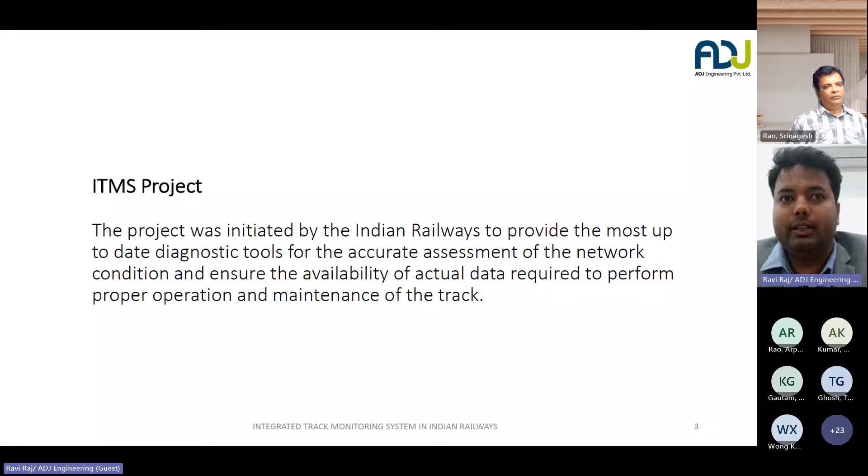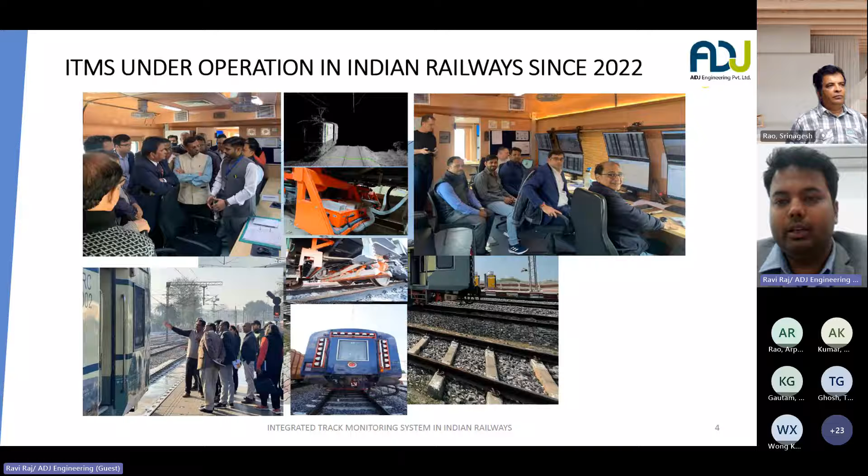Later, they moved to a contactless measurement system, which had a track geometry system and half rail profile measurement, which allows you to measure the track geometry also. It was not a full specification system, and it also had some acceleration measurement system. So railways decided to upgrade all the monitoring practices and take them to the next level, as the whole world is now following. These are some of the images of our projects. We have been operating this system since 2022 and have already completed more than two years of operation on Indian tracks.

The RDSO specification which governs ITMS is mentioned over here. You can see that TM/IM/382 is the specification floated by RDSO, based on which we developed, designed and manufactured this system and supplied it to IR. It has 6 subsystems. The main one is the track geometry measurement system. The second one is the full rail profile and wear measurement system. The third and most important one is the system for video recording of track components and analysis, which allows you to identify visual defects in the track in real time without any manual intervention.

Then we have acceleration measurement systems on the axle box, on the coach pivot, and on locomotives. Another important system is the system for identification of any obstacle in the schedule of dimensions of Indian Railways. And the last one is the rear window video recording system. In the next slides, I'll be detailing the functionality and the parameters provided by all these six subsystems.

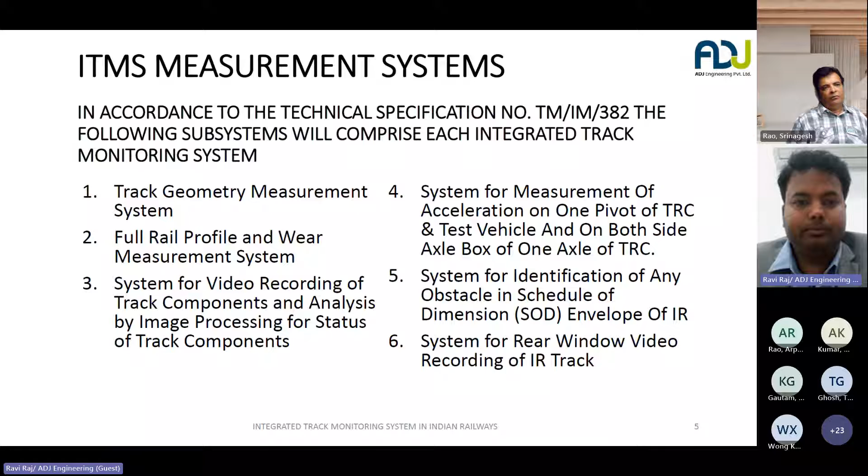So here you can see the general layout of the system. So we have been provided with a LHB coach, what RDSO calls track recording car, and on the same coach we have installed all our sensors. So on the leftmost part you can see some sensors installed. These are the sensors which we utilize to identify any infringement in the schedule of dimension.

Then here at the bottom, can you see my cursor? Yes, we can see it.

Yep. Okay. So here we have our video inspection system, and then on the other side we have track geometry and rail profile measurement system installed, and we have several other cameras installed, which enables us to identify some special kind of visual defects. And then we have acceleration sensors installed on the axle box. GPS sensors are installed on the top, GPS antennas.

In the lower part, you can see the inside arrangement, how the working spaces are designed. So we have four operator consoles where we can keep monitoring the evaluations being done by the system, what are the defects identified, if there is any urgent maintenance alarm. Then we have all the server racks, sitting area, and the printers are also there, which keep printing during the recording time to give you an online report.

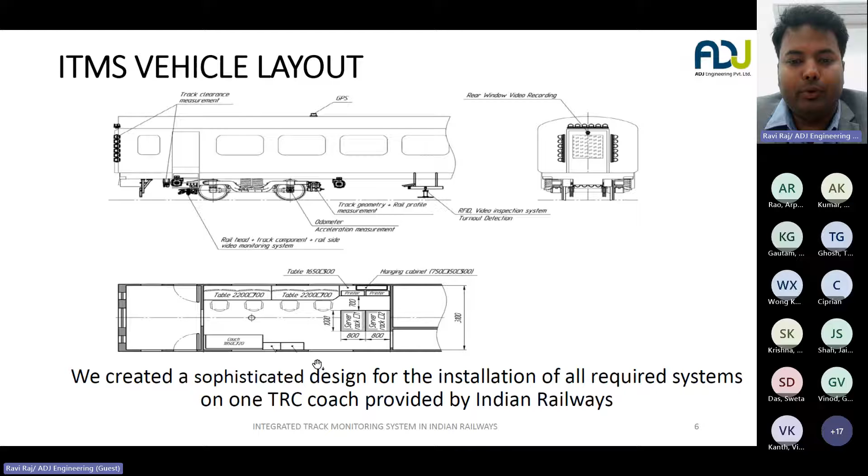So the first system is the track parameter recording system. So this system is based on the inertial measurement principle, contactless. It has a few main hardware components which I'll point out. So we have an inertial measurement unit, and we have a full rail profile system. So the hardware for track geometry and rail profile system is the same, and in combination they give us the parameters of track geometry as well as the rail wear. So in the track geometry, we are able to measure gauge, cross level, alignments, twist, wear, cant, and gradient, which has been suggested by RDSO.

Here you can see there are two of these boxes, one for each rail. It has two laser lights, and then we have 3D cameras. So how does it work? I'll use this slide. So the laser illuminates the surface of the rail, and then we use our 3D cameras to take the images. So we get an image like this, and then we interpolate and get the complete triangulated view of the rails.

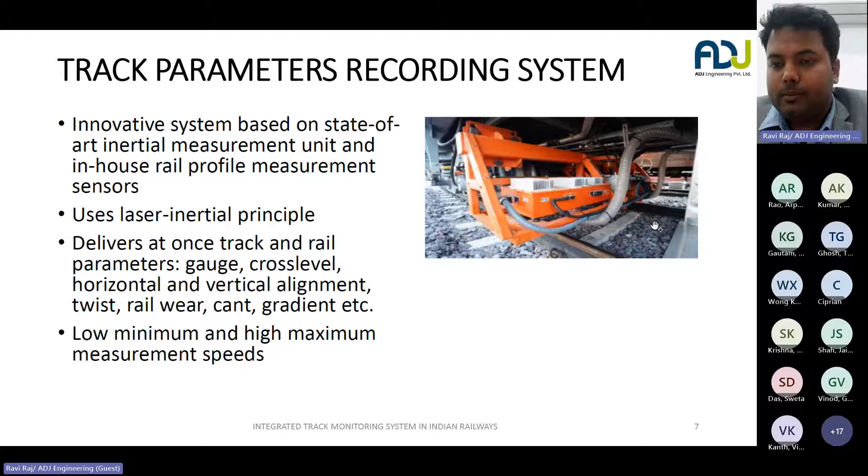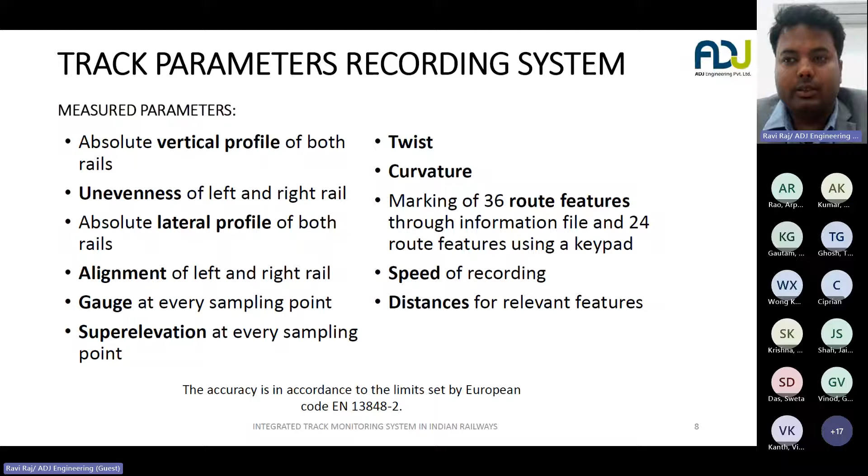So these are the parameters which are being reported by the track geometry system: vertical profile on both rails, unevenness, lateral profile, alignments, gauge, twist, curvature, speeds, super elevation. These are the features of the track geometry system, and this complies with the latest norms of EN 13848-2, which is specifically tailored for track geometry systems.

Then we have full rail profile. As I said, the hardware for track geometry and rail profile systems is the same. It complies with the EN standards 13231 and 15302. So as I said, using the laser scanners, laser lights and the 3D cameras, we are able to measure the full profile of the rail. So here you can see how we get the output. The lighter blue part is the ideal rail profile, and then the black part and the purple parts are being captured by the system.

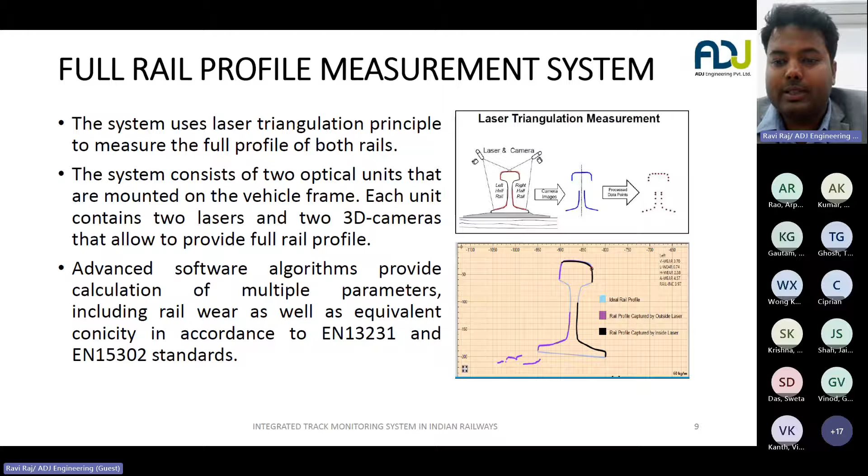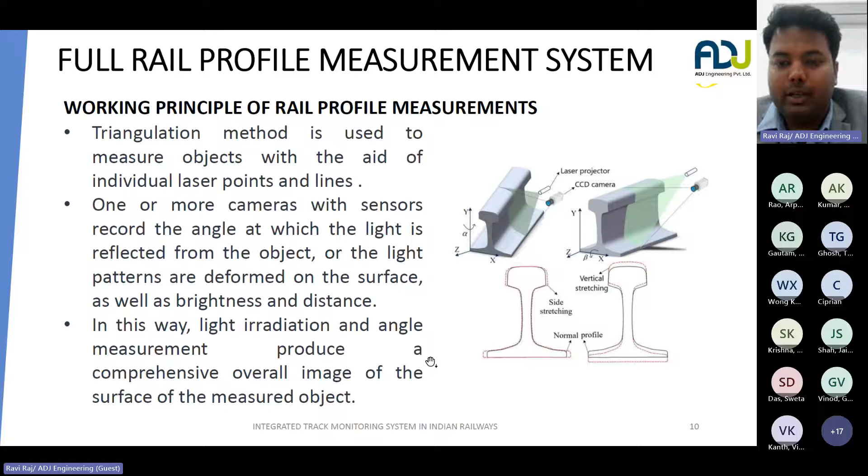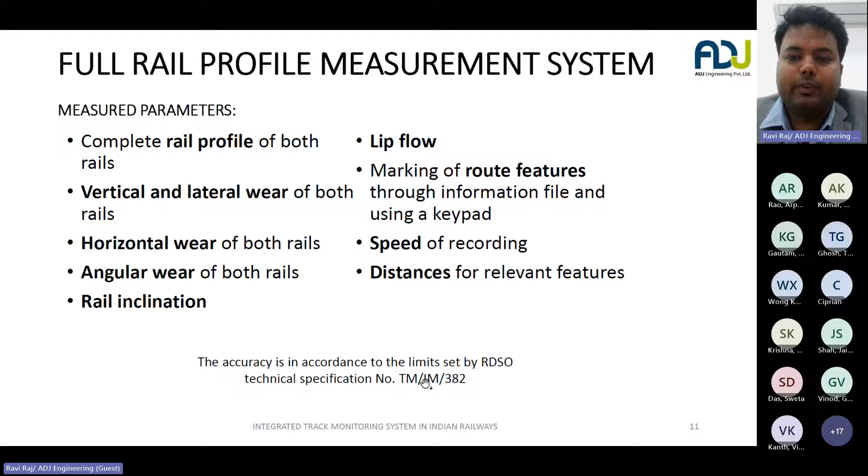And using the inertial measurement unit, we can identify the alignment of the rail, how the rail is placed on the ground, and then we superimpose our measured image of the rail, which allows us to measure the wear parameters. Here I have detailed how the inertial measurement principle is working, the triangulation method, as I have already explained earlier. So the full rail profile system allows us to measure complete rail profile, vertical and lateral wear, horizontal wear, angular wear, rail inclination, lip flows, and this has also been commissioned in accordance with the RDSO specification and the EN norms.

So when railways were using manual methods, manual practices for this measurement, due to similar limitations, it was not possible for them to get proper data of the track. So now, after the introduction of these state of the art technologies, it allows them to measure the wear properly, in a digital form, and keep it for their records and for further maintenance.

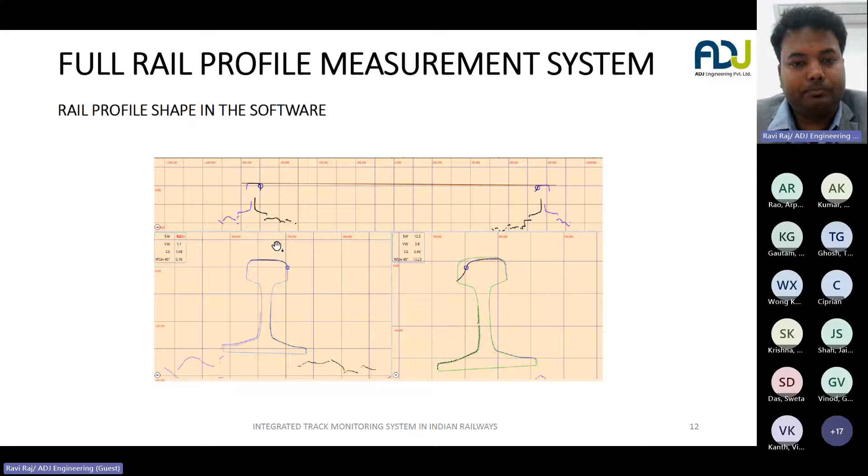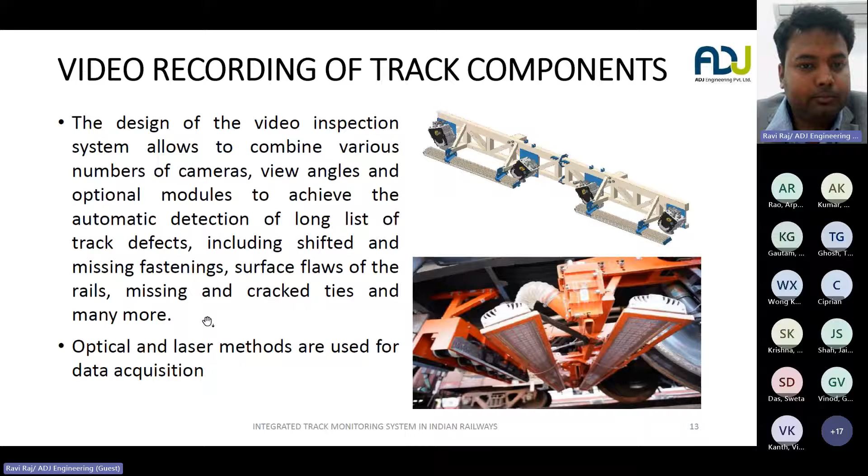I'll explain how the system works. So the line scan cameras capture the image of the track, and we get several pixels. Now our processor merges all these pixels and creates an image, and when we keep interpolating, it appears that we are recording a video, but in reality it is a single line image which is merged to form an image and later a video of the whole track.

So why is it necessary to use such a line scan camera of high sampling frequency? Because we are seeing very minute defects in the size of 0.1, 0.5 mm. Like there are some defects on the rail, like some linear defect or some gauge corner defect. So it is important that we have very high quality images so that we can identify defects of such small size.

Now, when we have the image of the track, the video of the track, after merging all these pixels, we go to our system learning part. So first of all, we train our system how the healthy track components look like. So suppose we are training the system how to identify an ERC clip, we will feed all the healthy clips to our system.

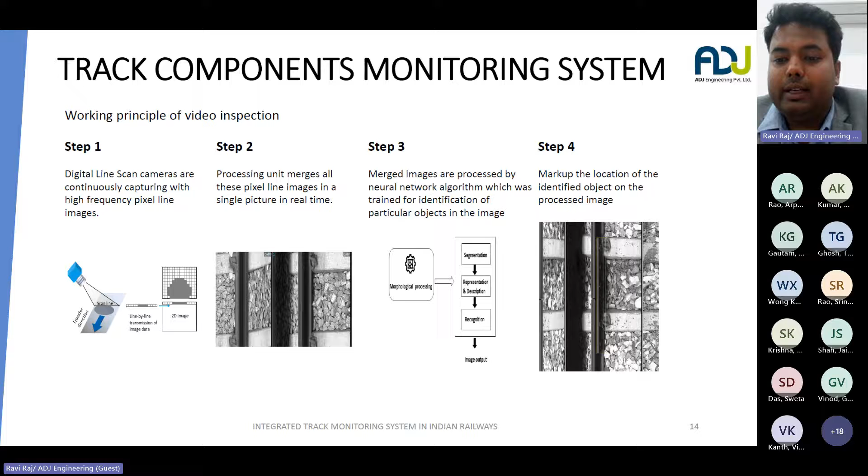In the sleepers, we are identifying sleeper crack, sleeper misalignment, sleeper spalling. We also check the sleeper level if there is something unusual with the levels of the sleepers due to missing fastenings. And in fastening, we are identifying missing clips, shifted rail pads, and missing bolts. In ballast, there are several defects associated with ballast, and RDSO has also specified to identify some components such as SEJ, axle counters, level crossings, and as I said, the defects of ballast such as excess or lack of ballast.

It is possible that if our users want to introduce some new defects, then we will again have to go through the system learning process and we can start identifying. So anything which can be seen and which is visual, the system can be trained and that can be identified.

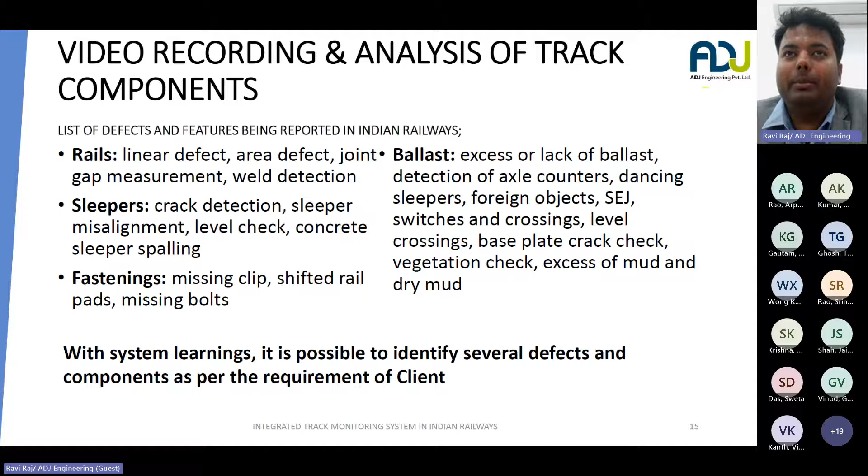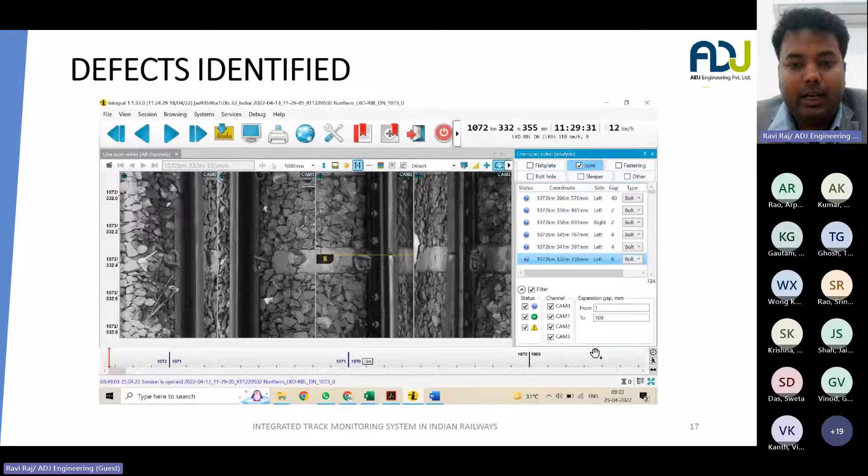On the next slide, you can see that we have measured the joint gaps. The system can measure joint gaps more than 1 mm, and RDSO has specified that we should identify joint gaps which cross 2 mm. Here in this image, you can see a joint gap of more than 8 mm has been identified, and you can see several other joint gaps identified in this section.

Next, you can see that the system has identified missing bolts. All this identification is being done in real time without any manual intervention. So we keep on recording and the system keeps on adding the defects in this list.

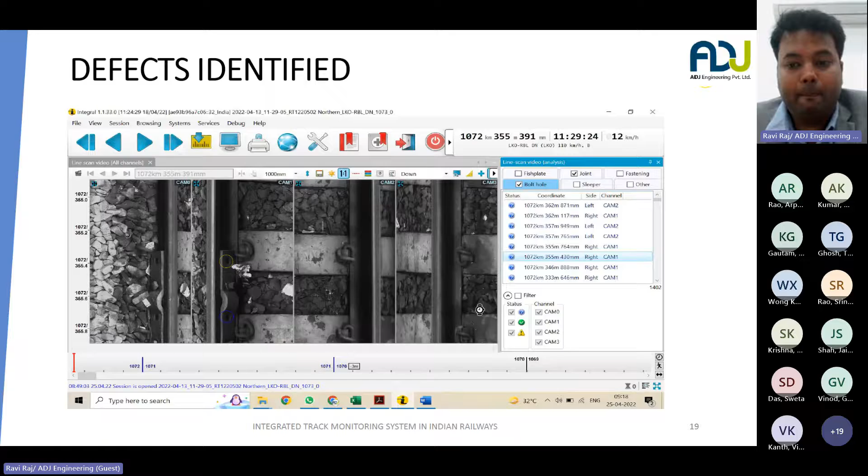Then we have identified sleeper misalignment. We also identify the distance between two sleepers, if there is a mud excess, or excess or lack of ballast. So almost 27 defects we are identifying in real time.

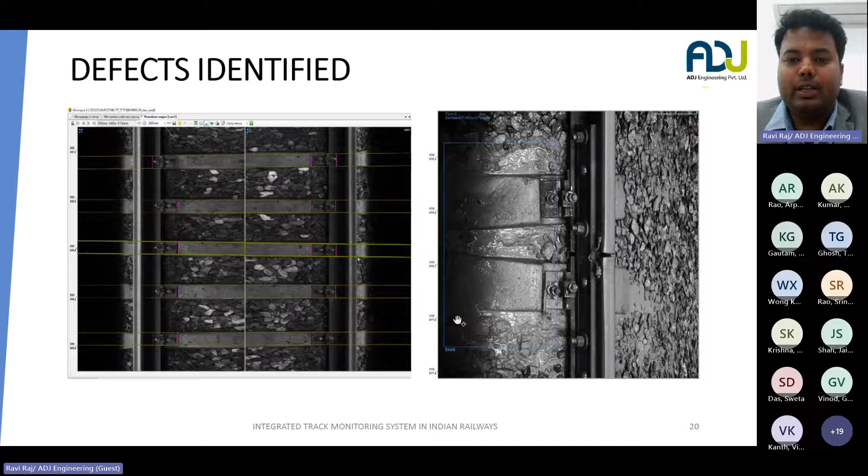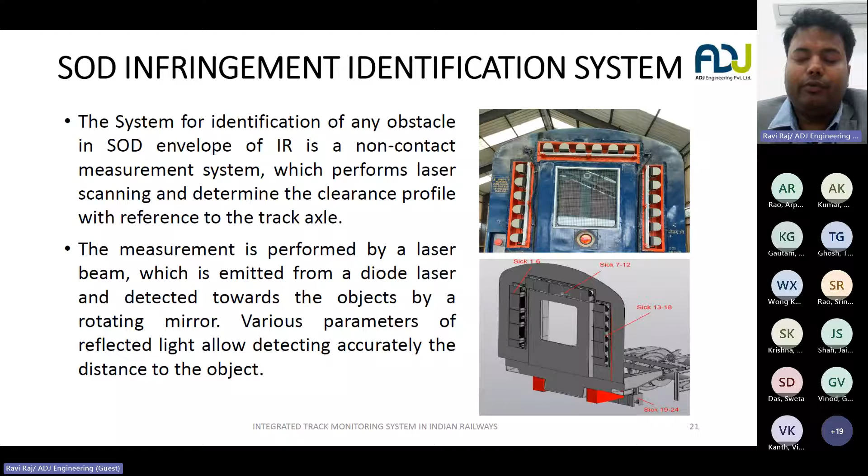The next system, which is also very interesting, is for identification of any infringement in SOD, Schedule of Dimension, of Indian Railways. Railways has specified us to identify any defects in a step of 100 mm, and to achieve that parameter, we installed almost 24 high-end LiDAR scanners. LiDAR scanners are a type of laser scanner, but they keep on revolving, and have a mirror, which allows us to create a 3D mapping of the infrastructure.

And there we introduce the different Schedule of Dimension envelopes, which have been specified by the user, in this case RDSO. So we identify defects in almost 7 envelopes now.

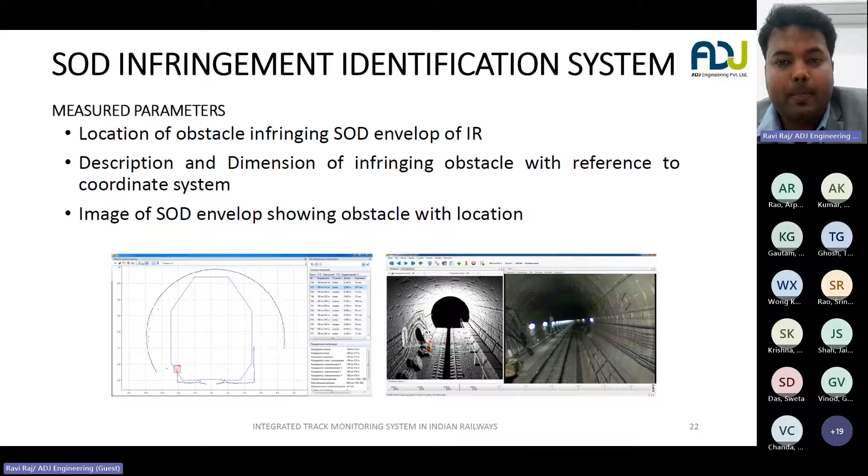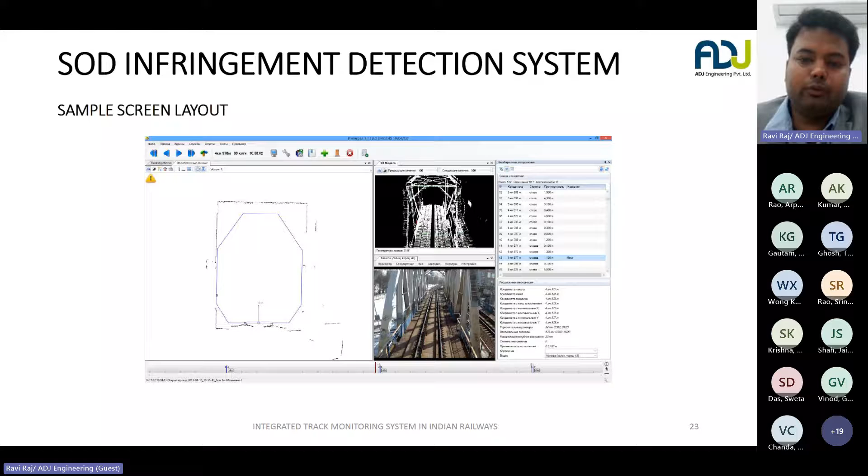Next system is a system for acceleration measurement. As per RDSO specification, we have installed accelerometers at 3 locations. The first one is at the axle box, and the range of this accelerometer is plus minus 100 G. This accelerometer installed on the axle box allows us to monitor the track quality. If there is anything unusual with the rails, it will definitely reflect as a high value acceleration once we are recording.

Next, we have sensors installed on the bogie pivot, which allows us to measure the riding comfort. Between the coach floor and the rail level, there is suspension, so we do not get as high data as we get on axle boxes. That is why we are using a 2G range accelerometer on the bogie pivot, and that allows us to measure the track riding comfort.

Based on that, further actions are taken, because it is very important when we are operating railway infrastructure — passenger comfort is also a priority. You must have experienced that sometimes we get high jerks, and this is only because of some issue with a particular section, a particular point where it happened. It might be due to some unusual condition with the rails or anything, so that needs to be addressed. This system gives us an insight into the condition of the track and passenger comfort using these accelerometers.

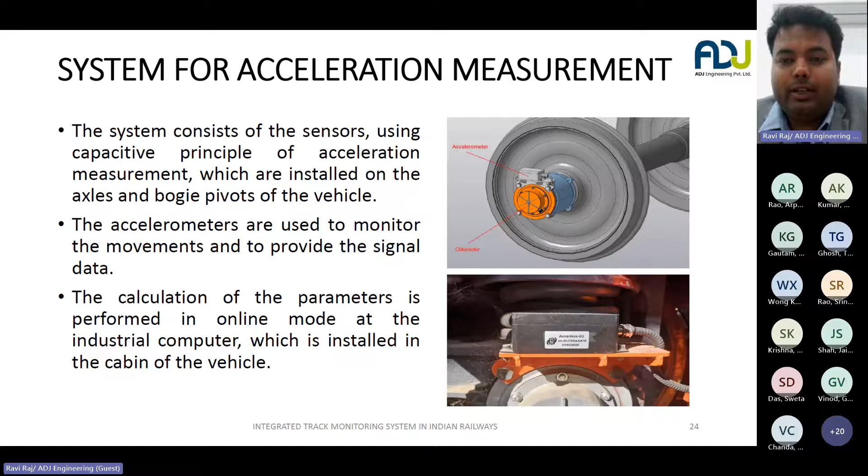Each sensor has two axes, so we can measure vertical and lateral accelerations at any of these accelerometers.

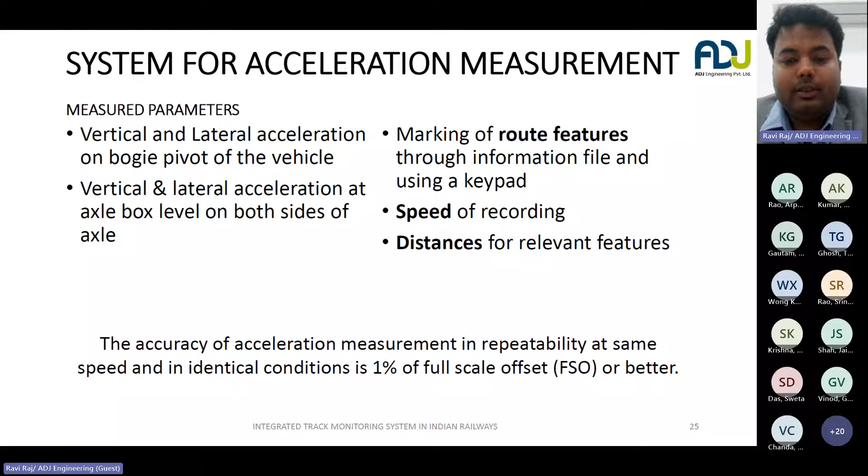So the last system is the rear window recording system. It's cameras installed on the rear part of the coach, and we keep collecting the video images which can later be seen. So in case we get any high peaks or any track defects, it is not necessary that the team should visit to see what is exactly there.

So after completion of the run, we hand over all these images, all these video recordings, so that when we are analyzing or seeing any particular peaks or particular alerts, we can also see what exactly this point is. So is there any track feature or anything happening which is resulting in such peaks? Some track attention is being done. So this is the sixth subsystem and the final one.

So the interesting thing about this project is that this system has been supplied by us, and the operation and maintenance of this system are also awarded to our company. So we will be doing the operation and maintenance for the next 7 years after commissioning of the system.

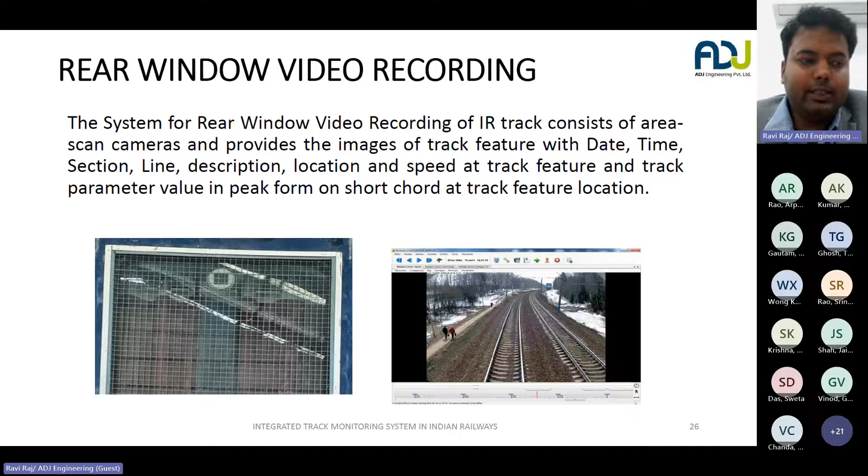So after every day's recording, we have some online reports. Then it is possible that we can compare the results of today's with any last recording which we did with the same system. So this allows us to see if there is some improvement or things have deteriorated. And then we also have some special formats which allow us to upload the data on the track management system of Indian Railways. So here on the screen you can see some reports.

So on the left side you can see that we have the reports of the MMD SOD infringement identification system. It shows you which special envelope this particular report is about. It shows you the date, times, division, the size of the defect, the location, and its distance from rail center and height from rail level, with some images.

Then we have the graphs of all the track geometry parameters. So here we apply our thresholds and we get the track geometry alerts. Next is the track feature report. So on every track feature, railways keep special attention to the track geometry. So this report is being used for monitoring of the track geometry at level crossings.

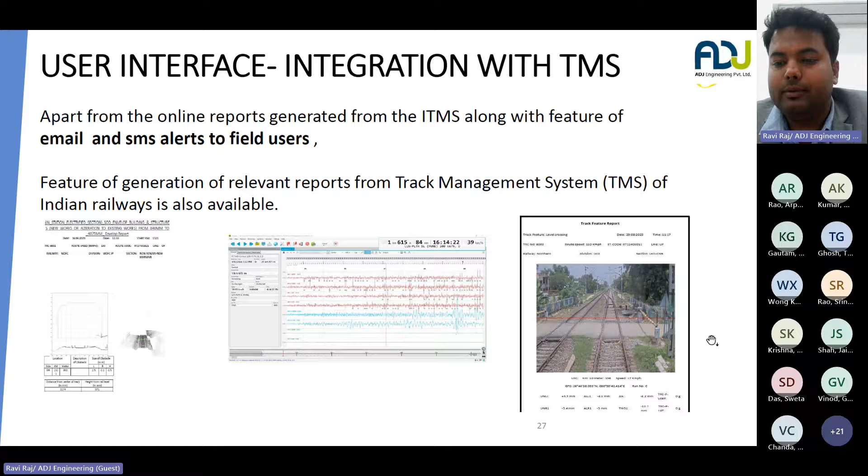This is the user interface of the track management system of railways. So after recording of the session, on each day we upload our results on the website of Indian Railways, which can later be accessed by any of the users in that particular section to take any necessary maintenance action.

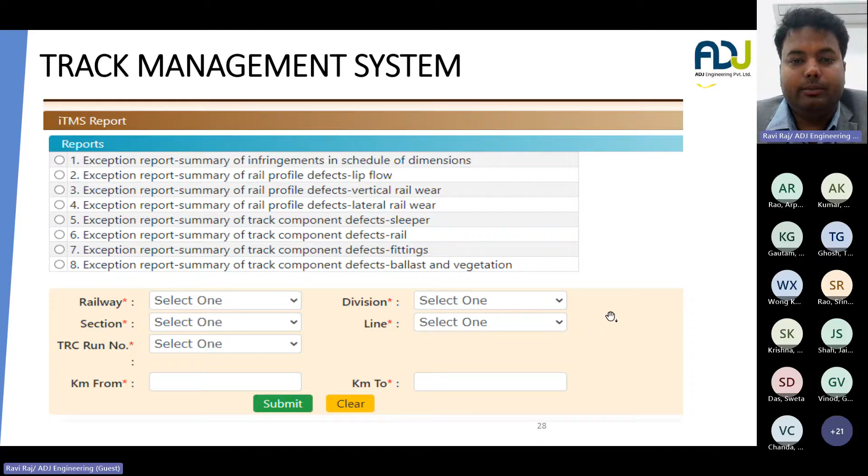So what are the advantages of such an integrated system? It is when we do monitoring with several numbers of vehicles. Suppose we use one system for track geometry measurement, another system for visual inspection, and for SOD. So when we integrate all this, we get comprehensive data. In addition to that, it allows you to save cost and ensure the reliability of your reporting when we cross compare the results of different subsystems at a particular place.

The data, it is important now that railways is planning to enhance the speed limits, to enhance the axle load limits. A new set of trains with very advanced amenities are being introduced. At the same time it is very important that such integrated systems are there, because the utmost priority is that the passengers, the travelers and the crew of Indian Railways be safe during the operation.

These systems have been used in other countries for the last 1 or 2 decades, but lately they have been introduced in IR, and we believe that the introduction of these systems will open up a new era of safety and a more reliable Indian Railways network. So this is the end of my slides. I am open to your questions.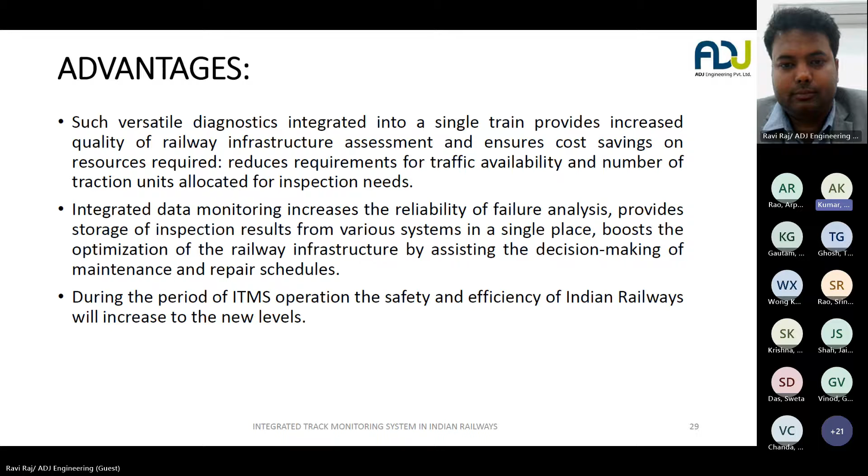Thank you, sir. Thank you for that very insightful presentation and your explanation. We got to know a lot about how the integrated track monitoring system works, what its uses are, and how exactly we are using it in maintenance and inspection of our Indian Railways. So thank you once again for that.